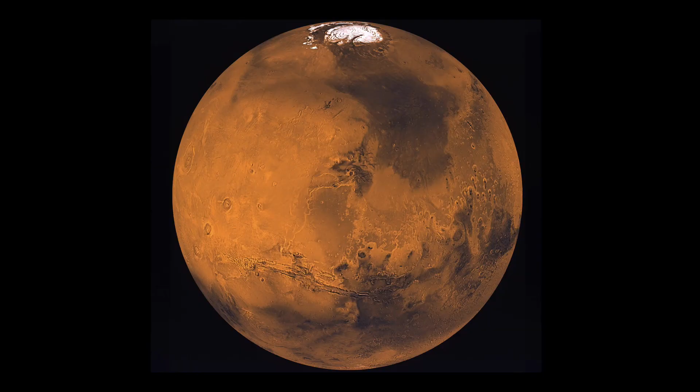NASA's Viking project accomplished the first successful robotic landing and detailed scientific study on the surface of Mars, twice. Vikings 1 and 2 were launched from Earth in 1975 and reached Mars in 1976. Each of the two Viking missions had an orbiter spacecraft and a lander spacecraft.

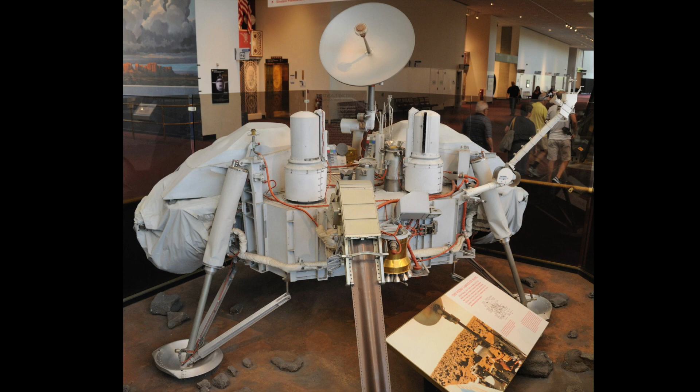The orbiters acted as mothership for their respective lander, encapsulated for protection during launch, cruise, and an initial Mars in-orbit period of about a month. The landers were designed and built by Martin Marietta Aerospace, now part of Lockheed Martin. Both Viking landers 1 and 2 landed safely in July and September 1976 respectively.

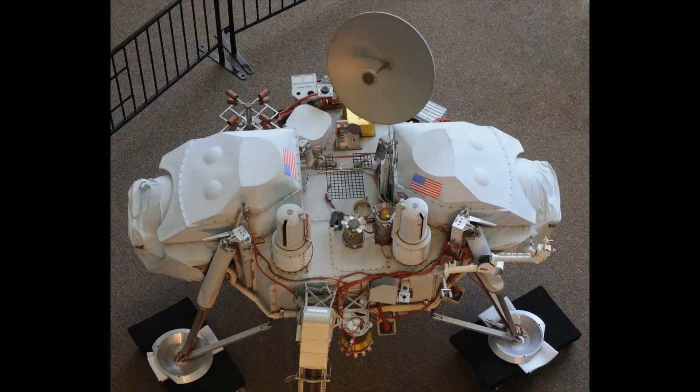In order for humanity to learn the results of the lander's imaging and other science investigations and engineering aspects of the lander spacecraft, some means of interplanetary communication was necessary. The landers also needed the ability to receive information from mission controllers on Earth in order to adapt pre-programmed plans to actual circumstances encountered on Mars. Therefore, each Viking lander had specialized radio systems.

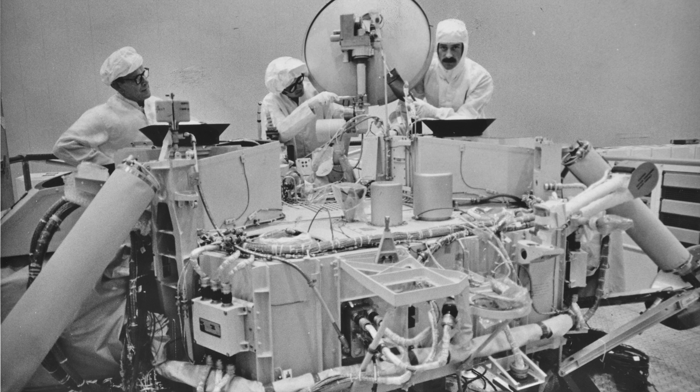All of the lander's radio components were designed and built by RCA as subcontractor to Martin Marietta Aerospace, who built the overall lander. Martin Marietta also provided the interface hardware for mating the radio equipment to the lander, parts of which were rather complicated, as will be shown. The lander had two independent radio subsystems.

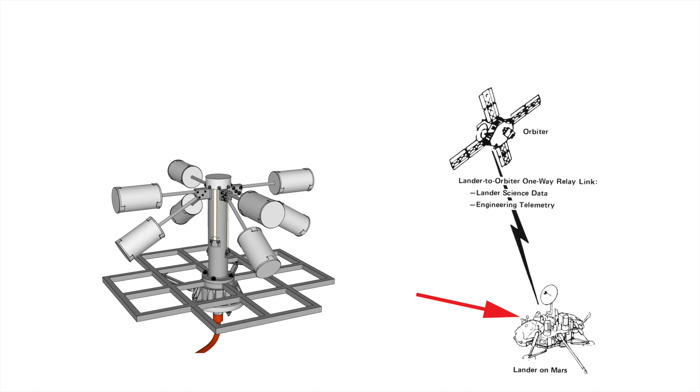The relay communications equipment, which used a broad pattern antenna to transmit information from the lander to either of the two Viking orbiter spacecraft orbiting approximately once per day around Mars. The chosen orbiter would then relay the information to Earth using the orbiter's relatively powerful radio system. The lander's relay radio transmitted at 381 MHz in the ultra-high frequency or UHF region of the spectrum.

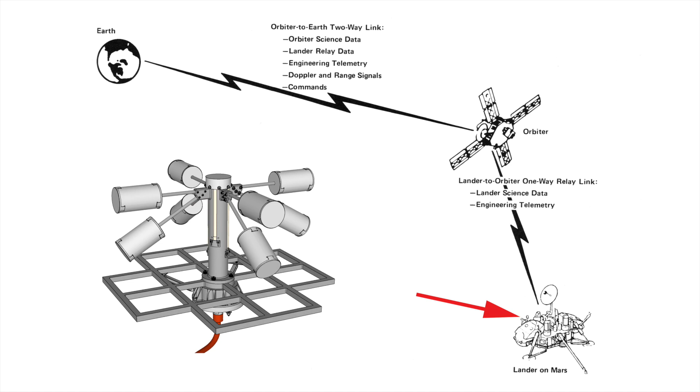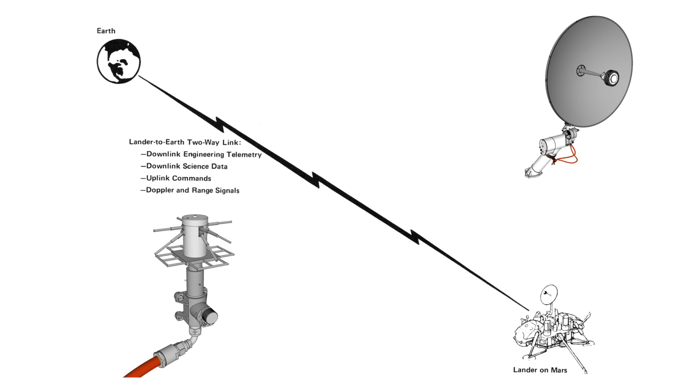The lander's second radio subsystem was the direct communications system, which could both transmit and receive information directly to and from Earth. There were two S-band antennas, a broad pattern low-gain antenna which could only receive from Earth, and a steerable high-gain antenna which could transmit and receive directly to and from Earth. This subsystem operated in the S-band region of the spectrum, receiving on 2113 MHz and transmitting on 2290 MHz.

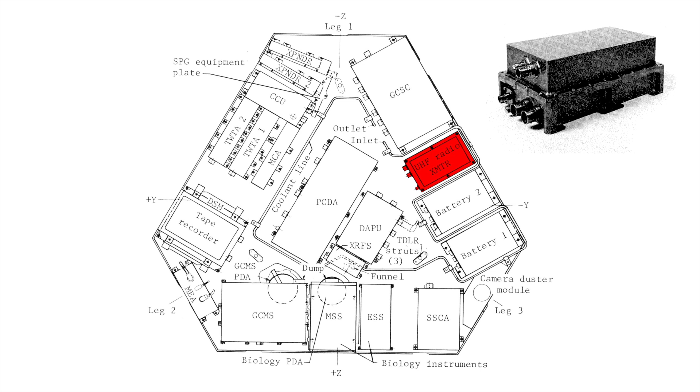All of the radio electronics components were built by RCA's Astro Electronics division and were located within the lander. For the UHF relay communications equipment, this included a transmitter. The S-band direct communication system had a number of components. Two transponders, which performed S-band radio frequency or RF reception and generation of the RF transmission signal using a modulator exciter unit.

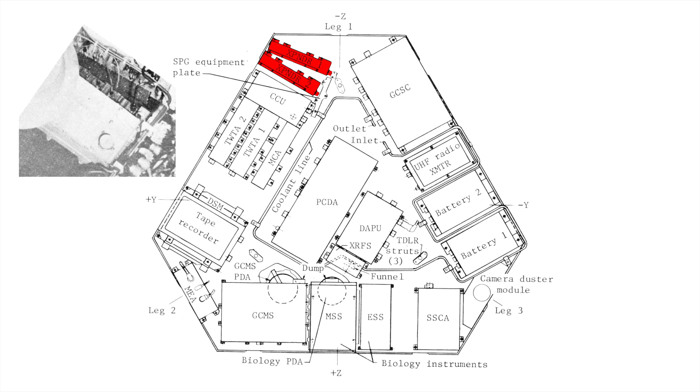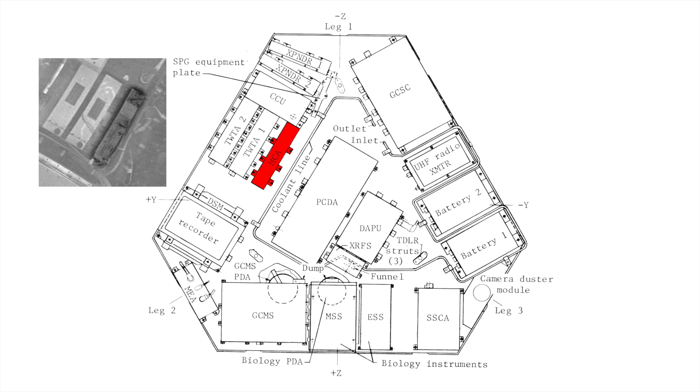Two traveling wave tube amplifiers, which provided power amplification of the transponder output as needed for transmission by the high-gain antenna. A microwave components assembly, which handled RF filtering and splitting of radio signals and switched the output of either traveling wave tube amplifier to the high-gain antenna.

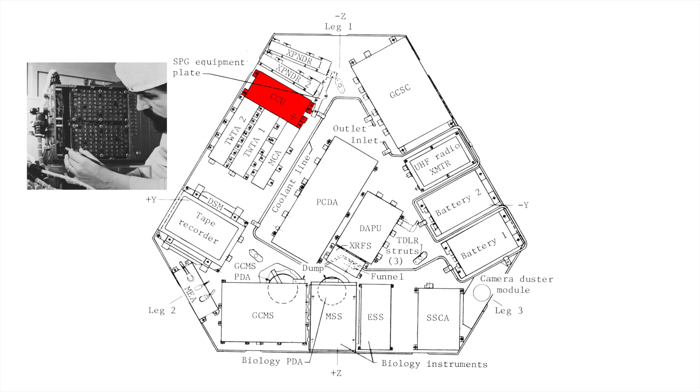A command and control unit, which handled command detection and decoding and interfacing with other components, including the lander's computer, and controlled the high-gain antenna steerable drive mechanism. The three antennas were built by RCA's Missile and Surface Radar division. This video uses a work-in-progress, high-fidelity digital 3D model of the lander to show mechanical aspects of the antennas.

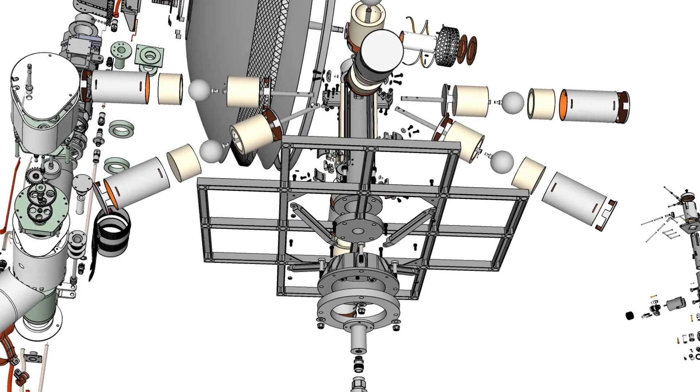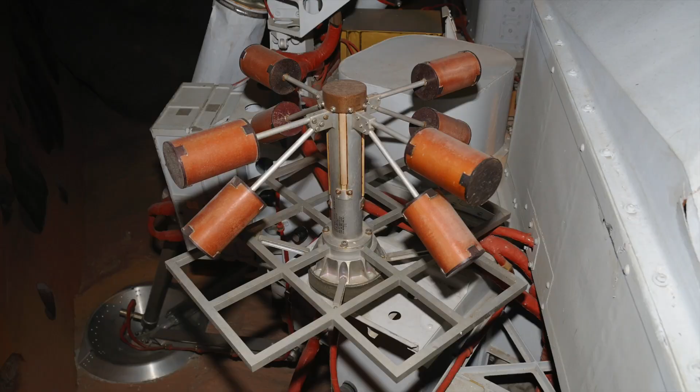The antenna used for a given communications pass depended on various factors, including phase of the mission, orbiter and Earth ground station scheduling, electric power available on the lander, and quantity of data to be broadcast. The first lander antenna to be used on landing day was the UHF relay antenna. It was activated just before the lander capsule separated from its orbiter.

Engineering and science data from the lander and from instruments mounted within the aeroshell to study the Martian upper atmosphere during descent were continuously transmitted to the orbiter, which transmitted it to Earth in real time. The data were also stored on the orbiter's tape recorder, which proved critical for Viking 2 when its orbiter lost communications lock on Earth during descent and landing. After orbiter recovery a few hours later, the stored Lander 2 data were successfully sent to Earth.

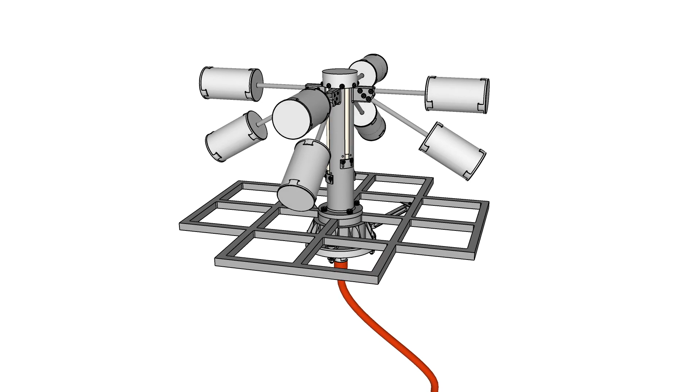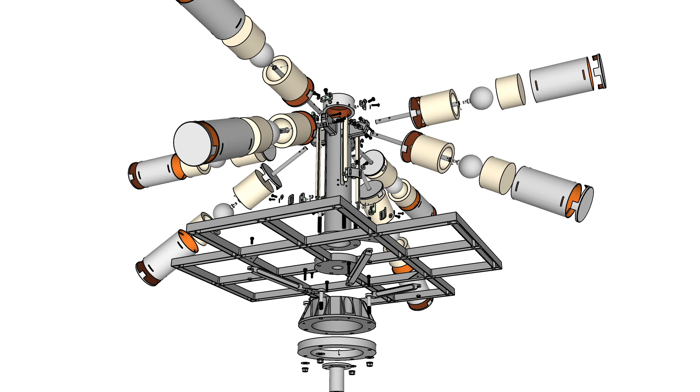The UHF antenna design featured two superimposed turnstiles over a tuned 3-wire grid ground plane. The arms of each turnstile emitted the radio frequency signal. The lengths and angles of the arms produced an approximately hemispherical radiating pattern. A broad pattern was necessary for the transmitted signal to reach the Viking orbiter without requiring accurate lander orientation, such as during Mars' atmospheric entry and shortly after landing as the orbiter passed high overhead. The open grid ground plane reflected the RF signal to increase its upward strength.

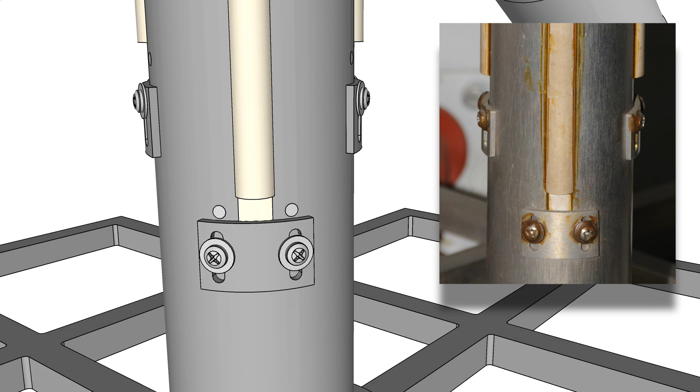Grid spacing was chosen based on the UHF wavelength of the emitted RF signal. The antenna central housing had 4 slots cut into it, which helped the antenna generate the exact desired RF frequency. Small tabs at the bottom of each slot allowed fine adjustment of the antenna characteristics. The slots were filled with insulating dielectric rods to increase the usable transmitter power, selectable between 1, 10, and 30 watts, without causing electric arcing across the gap. The rods also prevented entry of Mars dust.

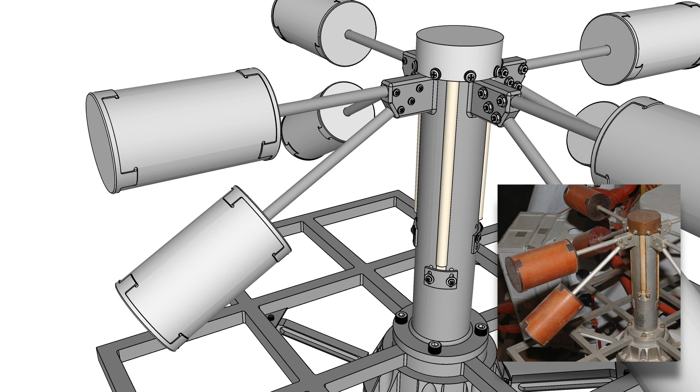Each arm terminated in a large metal ball. These prevented damaging corona discharge arcs from occurring at the arm tips, which are prone to occur in low-pressure carbon dioxide environments such as the Martian upper atmosphere. The corona balls were enclosed in polyurethane foam with fiberglass covers. The photograph shows an unpainted test antenna.

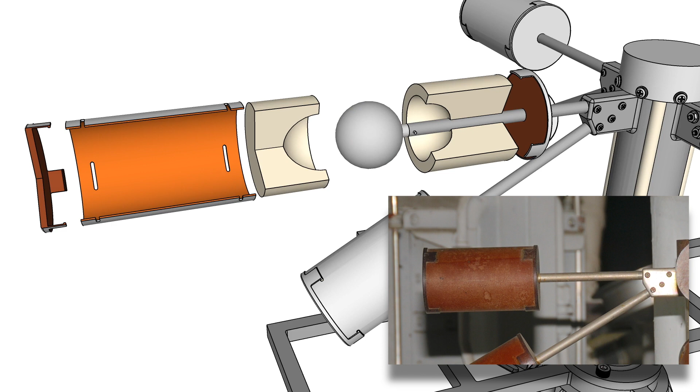Perhaps the most notable use of the UHF antenna was to transmit the first image ever taken on the surface of Mars, July 20, 1976. The image was captured and sent by Viking Lander 1 during the first few minutes after landing. Orbiter 1 relayed the image data to Earth in real time as it was being received from the lander.

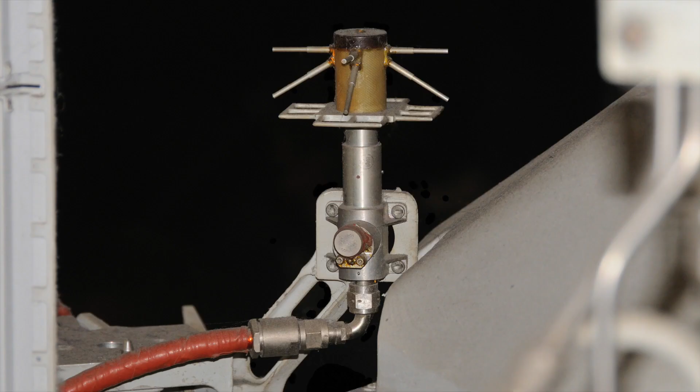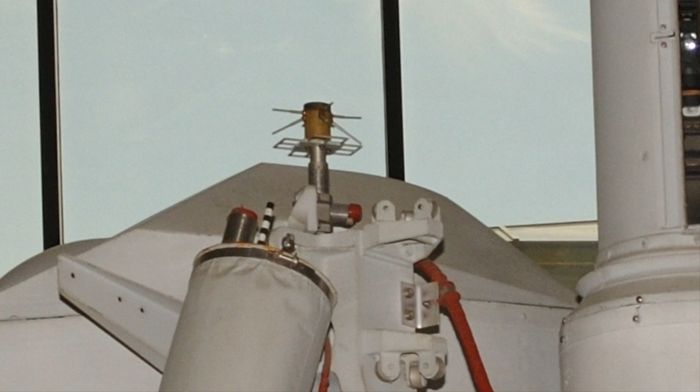The S-band low-gain antenna, or LGA, was designed to receive new spacecraft commands from Earth and store them into the lander's computer memory. In order to be as flexible as possible, the LGA reception pattern was essentially the hemisphere above the lander, so that if Earth was visible in the Mars sky, then the lander could receive a signal regardless of the lander's tilt or compass orientation.

The LGA had the same basic double turnstile over 3-wire ground plane reflector design as the UHF antenna, scaled smaller to account for the S-band's higher radio frequency and thus shorter wavelength compared to the UHF band. The LGA did not need any protection from corona arcing at the turnstile arm tips because the LGA did not transmit and thus did not have high power applied to the arms.

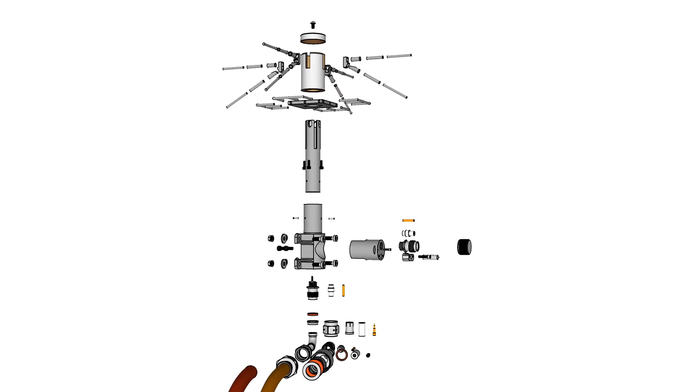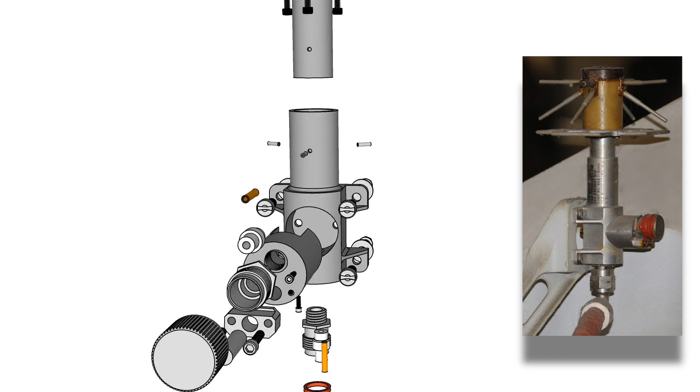Within a cylindrical fiberglass phenolic radome, the LGA's housing retains the 4-slot configuration of the UHF antenna. The photograph is of an unpainted test unit. The capped coaxial cable connector on the side of the LGA base was used during pre-launch antenna testing.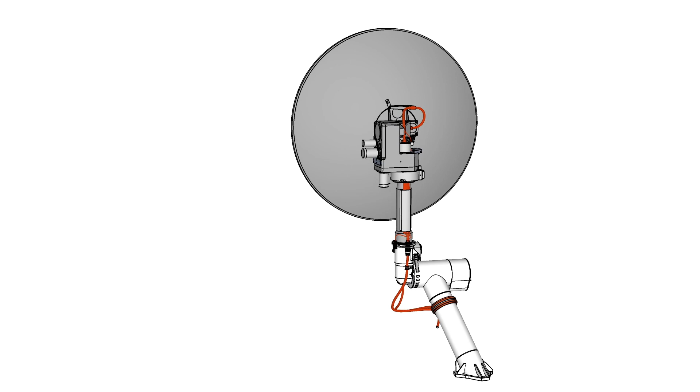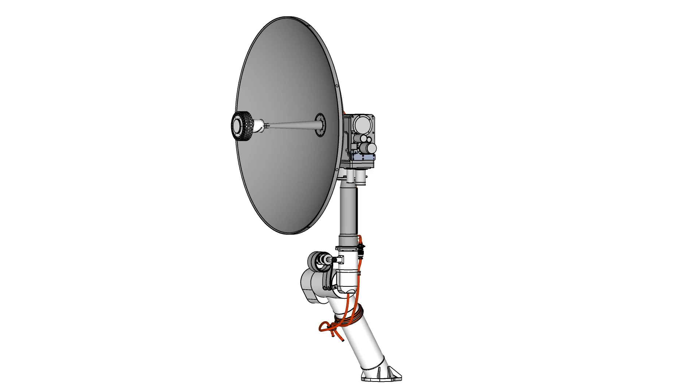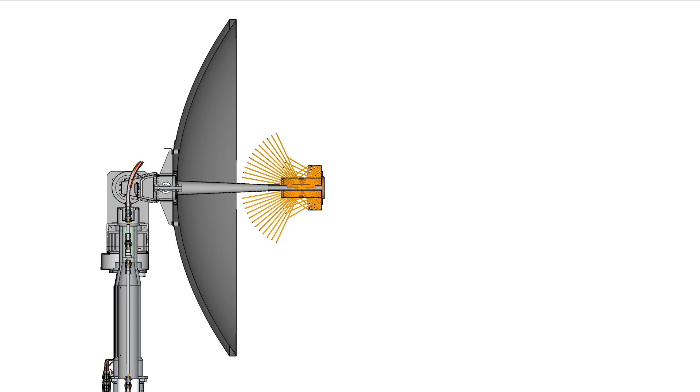The most complex of the Viking lander's 3 communications antennas was the S-band high-gain antenna, or HGA. In order to transmit a signal across hundreds of millions of miles that could be picked up on Earth, even by the huge and extremely sensitive receivers of NASA's Deep Space Network, the HGA needed to concentrate its 20-watt maximum RF power within a fairly narrow cone pattern pointed at Earth. This was accomplished by the HGA's 30-inch diameter parabolic dish reflector. The term high gain refers to effective amplification of the emitted radio signal by focusing its energy in the direction to which the dish points.

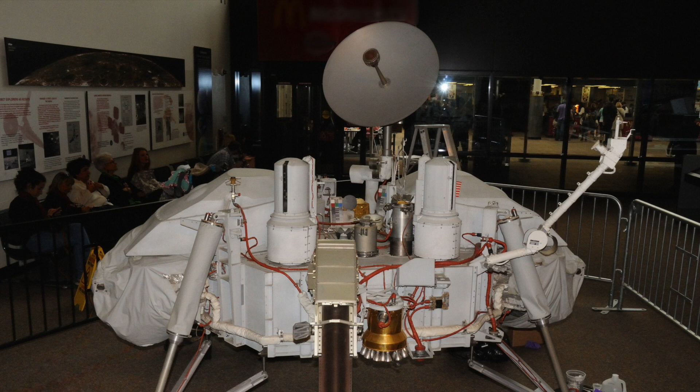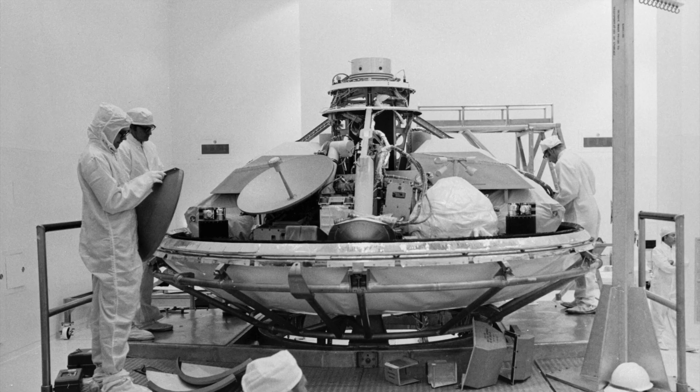The dish needed to be located as high as possible for best line of sight from the lander to Earth when above the local Mars horizon, in order to minimize obstructions from other lander components. Meeting this clearance requirement was challenging due to the limited volume available within the protective shell in which the lander was encapsulated until shortly before landing on Mars. As a result, the RCA-built antenna was mounted on a hinged deployment mechanism built by Martin Marietta. The HGA mast was stowed or folded down during launch from Earth, cruise to Mars, and landing on the surface.

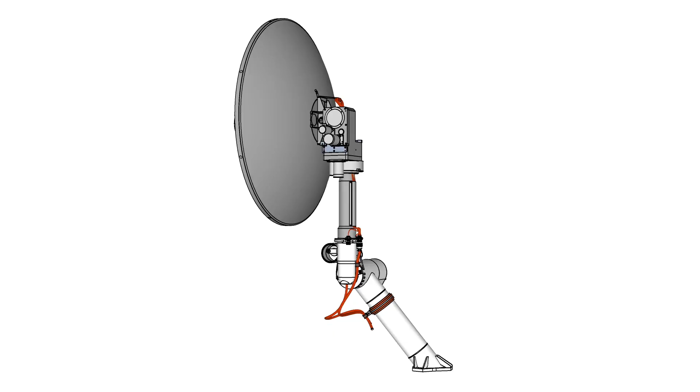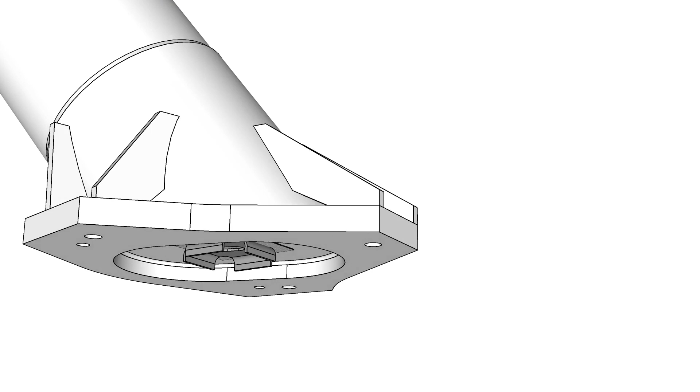Antenna mast rotation was precisely limited both when stowed and deployed by pins installed in the mechanism's elbow and stop shoulders integrally machined into the hub. The deployment mechanism's support tube and hub were vented via a filtered opening on the bottom of the base plate. This allowed the mechanism to cope with a range of atmospheric conditions, from Earth sea level pressure to the vacuum of space during cruise to Mars, to the low-pressure surface atmosphere on Mars. The filter prevented any Martian dust from entering the deployment mechanism and possibly jamming its bearings.

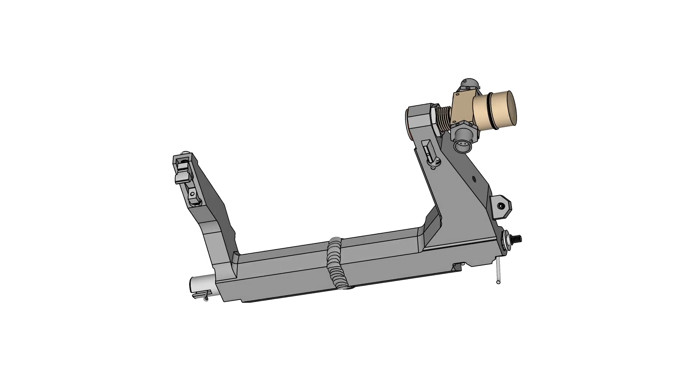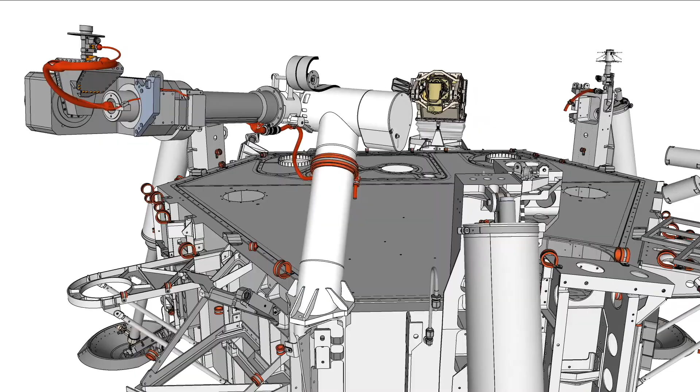A downlock mechanism held the stowed antenna in place securely, both to prevent inadvertent deployment and to stabilize the antenna during the strong vibrations of Earth launch, Mars atmosphere hypersonic entry, and landing. When manually stowed before launch, the HGA's drive head fitted between the two arms of the downlock. A tab on each arm engaged slots in the blue stabilizer fittings attached to the drive head.

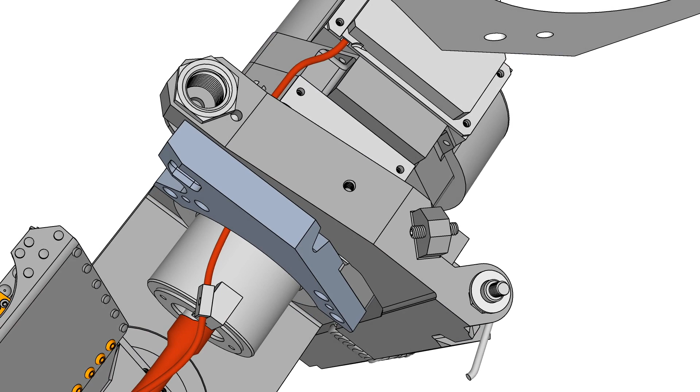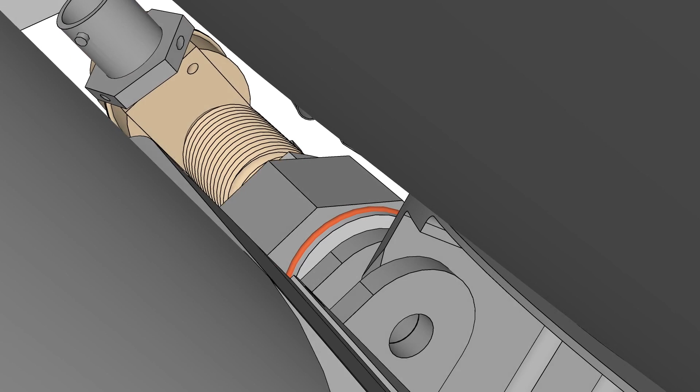The antenna was locked in place by a pyrotechnic pin puller device mounted on the downlock. Before launch, the HGA dish was rotated to align a tab on the back of the dish mounting frame within a clevis built into the drive head. A sturdy pin or rod extended from the pin puller and passed through clevis and tab. The pin thus locked down the HGA's folded mast and also kept the dish fixed in its minimum volume configuration.

Within the pin puller, a small shear pin prevented the main pin from retracting inadvertently. A few seconds after landing on Mars, the HGA was released by firing the downlock pin puller. The pin puller was actuated by two redundant Viking standard initiators, or VSIs. An electric current ignited a very small zirconium potassium perchlorate explosive charge within each VSI.

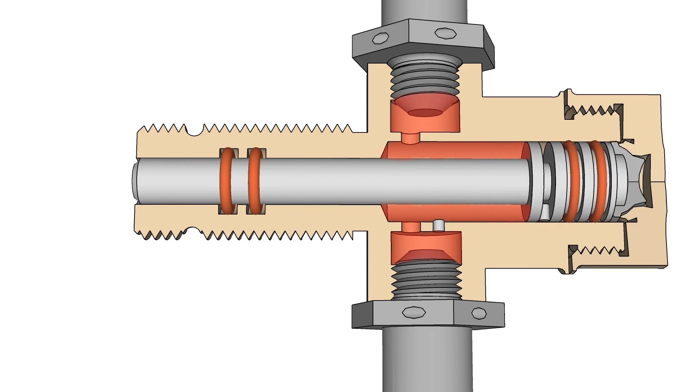The resulting rapid combustion generated a high-pressure pulse of gas which was expelled from the VSIs into a small chamber within the pin puller. The expanding gas pushed on the underside of the pin's flanged head with sufficient pressure to break the small shear pin. The main pin then rapidly retracted into the pin puller body. A deformable shock absorber cap slammed into the end of the pin puller and deliberately jammed the fully retracted pin,

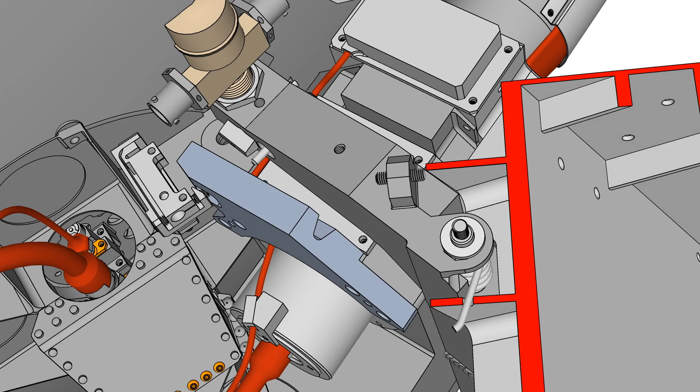preventing rebound. With the pin withdrawn from the clevis, a torsion spring on the downlock pivot axle rotated the downlock arms slightly away from the HGA drive head, disengaging the stabilizer tabs. That entire release process occurred in only a fraction of a second. The high-gain antenna mast was then free to deploy. The mast was raised by a pair of constant force springs.

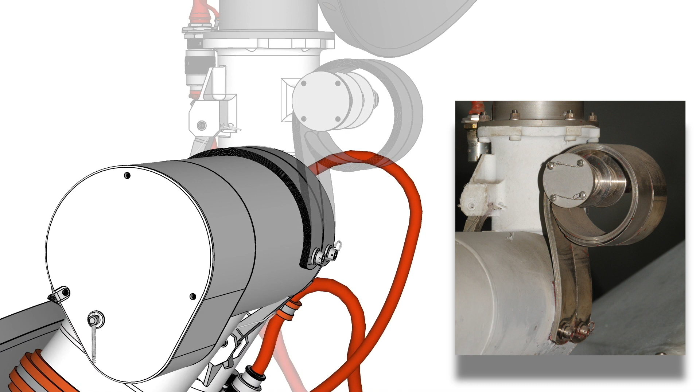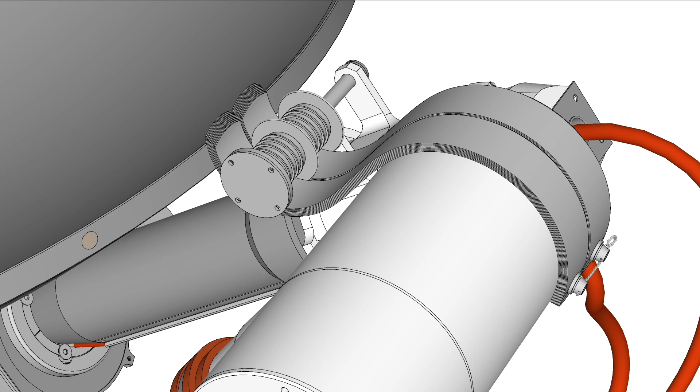The two roll-up power spring assemblies, each with 9 cobalt chromium nickel alloy laminations, provided 400 inch-pounds of torque. With one end of the springs anchored to the deployment mechanism's hub, the powerful curl-up or roll-up force exerted a pull on spools attached to the rotating elbow. The freewheeling spools reduced friction at the point of spring contact. As the springs returned to their natural, tightly curled state, the elbow was pulled upright, which raised the attached antenna.

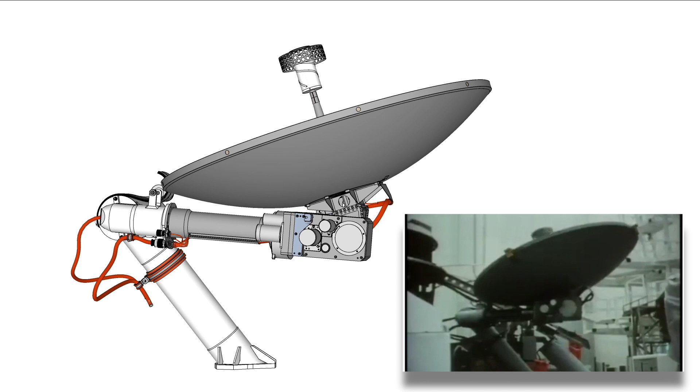The power spring's curl action was strong enough, if unimpeded, to raise the 6-pound in Mars gravity antenna fairly quickly, especially if the wind was helping to push the antenna dish. A potentially damaging shock could occur when reaching the upper stop limit. To prevent this, an anchor-recoil escapement governor limited the rate of mast elevation.

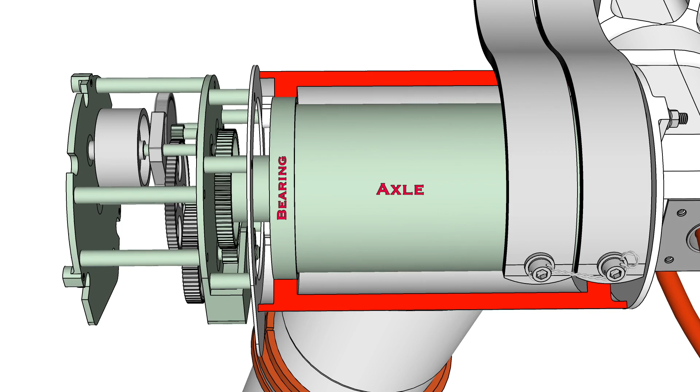The deployment mechanism's rotating elbow was connected to a sturdy axle within the hub. The axle and simplified bearings are tinted green to denote that the geometry is approximate. I lack references for the actual shapes. The axle drives a 300-to-1 gear train. The 3D model's green gearbox shape is speculative, but the gear train itself is accurate. The final stage of the gear train drives a 24-tooth escapement wheel through a simple ratchet clutch, which is engaged during deployment.

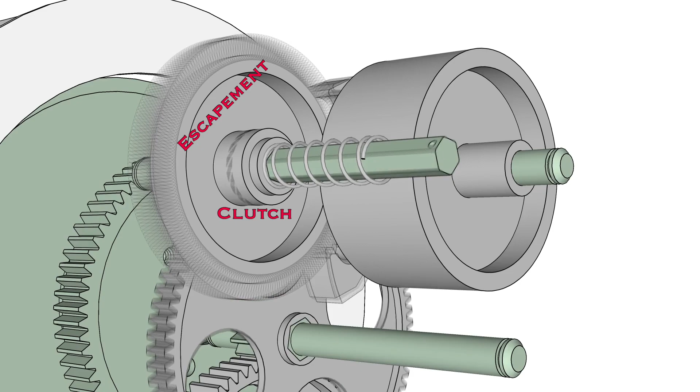A rocking pallet prevents unrestricted or runaway rotation of the escapement wheel. A cylindrical torsion or rotating pendulum is connected to the pallet, which adds rotational inertia to slow down the pallet's rocking action. Even with the torsion pendulum, the escapement operates very rapidly. The motion is slowed down by 20 times here to more easily see the rocking action of the pallet and the interrupted rotation of the escapement wheel.

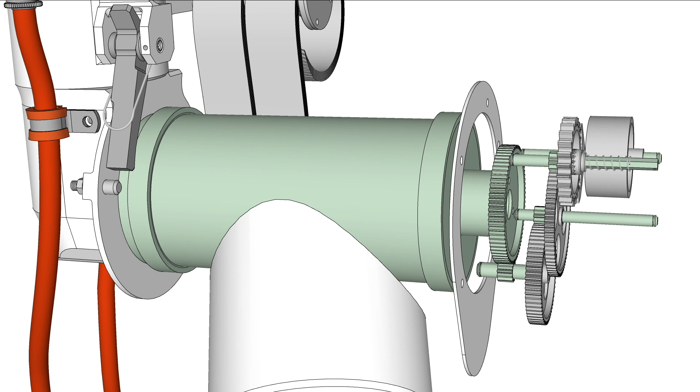The ratchet clutch mentioned previously allowed the governor mechanism to be bypassed while the antenna was stowed a number of times during testing and one final time before flight. This was important because the escapement was only designed to be driven in the forward direction. When the antenna and deployment mechanism were manually rotated down, as seen here, the elbow and axle drove the gear train in reverse.

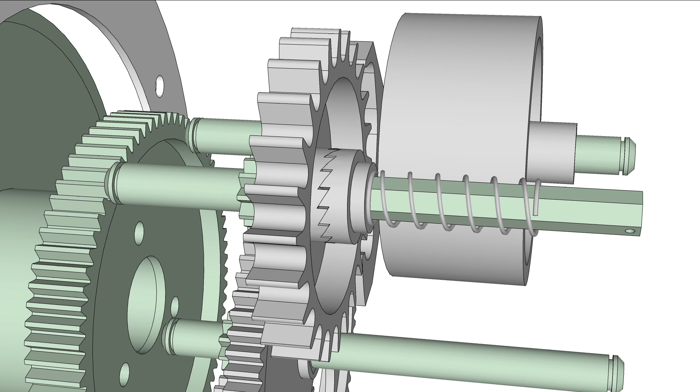That caused the teeth of the spring-loaded outboard half of the ratchet, which was directly driven by the final stage of the gear train, to skip over the inboard ratchet teeth that were machined as part of the escapement wheel. The escapement and pallet, therefore, could remain stationary during antenna stowage.

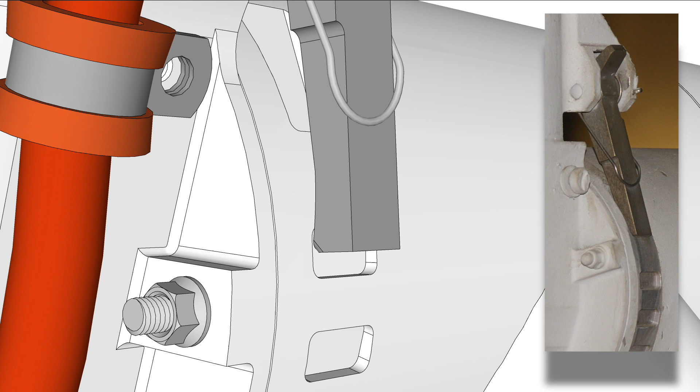To prevent the antenna from pivoting back down due to a mechanical failure or stronger than predicted wind gust, a ratchet uplock mechanism was used. After a few minutes of rate-limited rotation, the high-gain antenna was fully raised, locked, and ready for use.

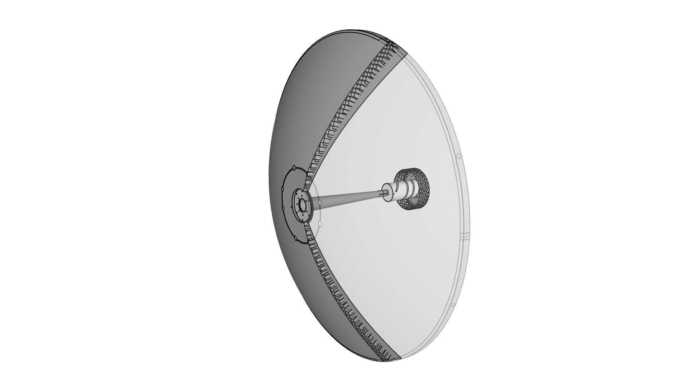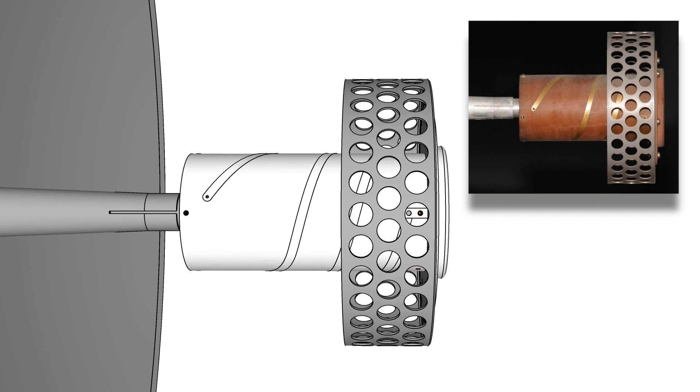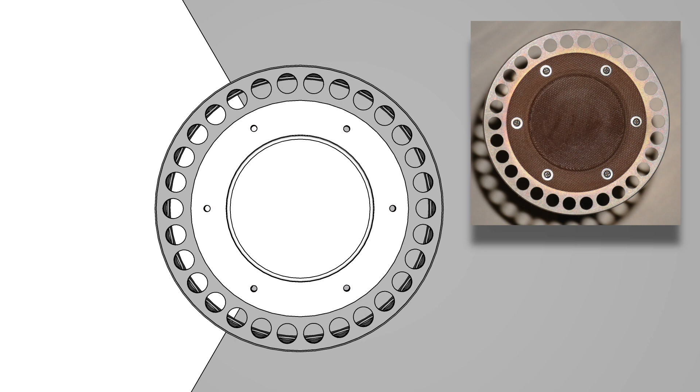At the front of the feed was a perforated cylindrical ground plane. This increased the antenna's effective power by reflecting radio waves to or from the feed. The perforations reduced weight and buildup of Mars dust without impacting RF behavior.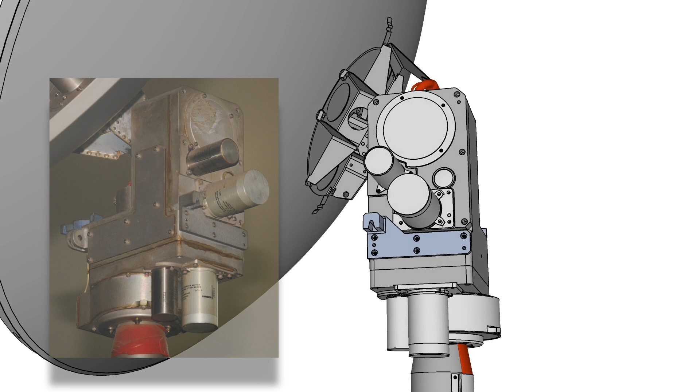The HGA sensitivity was highly directional and therefore needed to accurately point toward Earth. Continuous Earth tracking during antenna use was performed by a steerable drive head. The motion seen here is accelerated for clarity. Electric stepper motors rotated the antenna dish in azimuth, or side to side, and elevation, or up and down. Position resolvers on each axis provided feedback to the control circuitry to detect and correct actual versus commanded pointing direction.

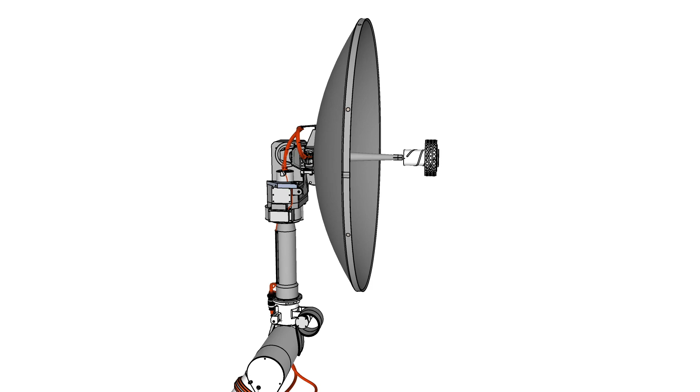The RF signal was passed through a coupler within the dish mounting frame and then via a coaxial cable into the drive head. A non-contacting rotary choke enabled the drive head to rotate without twisting the coax cable. Another segment of coax cable then carried the signal out the bottom of the stationary antenna mast.

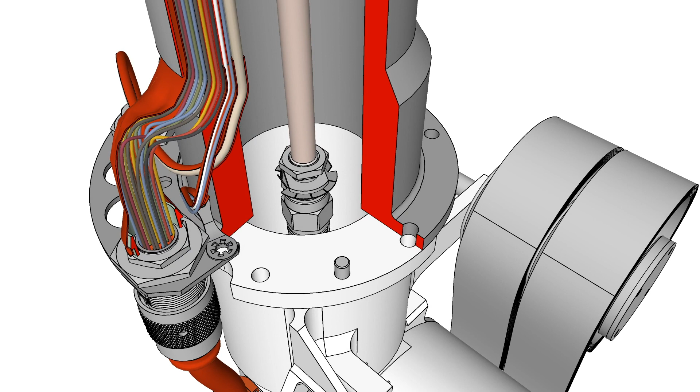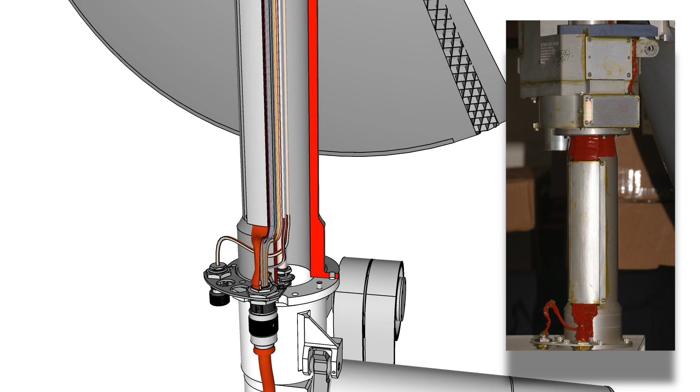An array of electrical control, power, and ground wires, along with a small coax cable which allowed sampling of the RF signal during pre-launch testing, were routed under a shield on the outside of the mast. Within the drive head, the wires had sufficient slack to be able to wrap twice around the drive head azimuth axis.

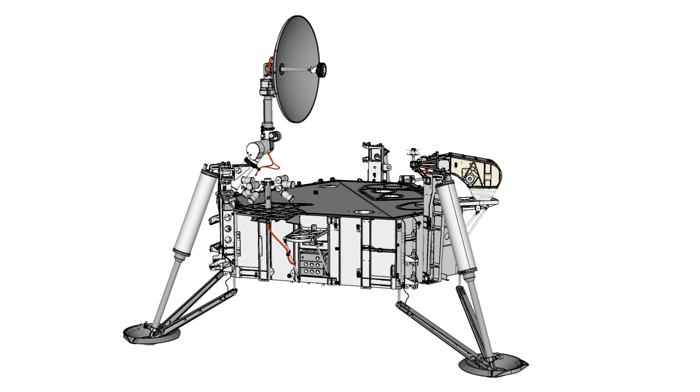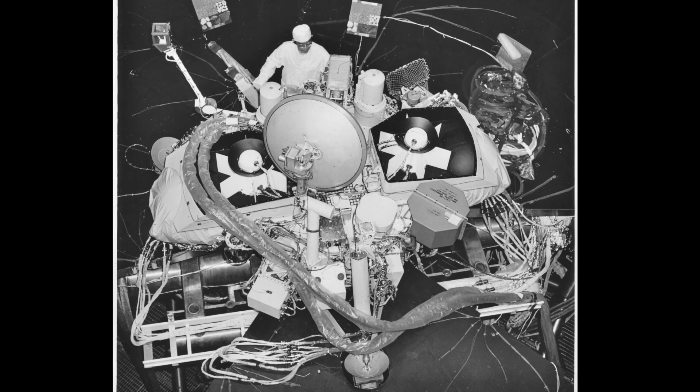The high-gain antenna on Viking Lander 1 enabled it to continue operating on its own after the two Viking orbiters reached their end of life and were shut down, 1978 for Orbiter 2 and 1980 for Orbiter 1. Viking Lander 2 reached its end of life in April 1980 after 3.5 years operating on Mars. Lander 2's rechargeable batteries, which were powered by plutonium-fueled radioisotope thermoelectric generators, had failed.

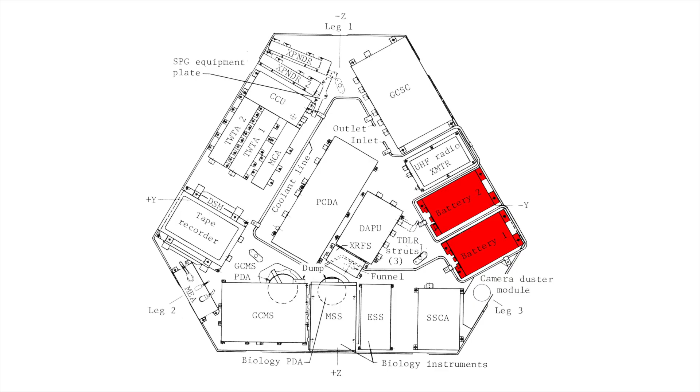Operation of Lander 1, the last surviving Viking spacecraft, ended in November 1982 after 6 years operating on Mars due to a mistake involving its high-gain antenna and batteries. The nickel-cadmium batteries on both landers had experienced gradual loss of charge-holding ability, as do rechargeable batteries to this day. Occasionally, new software was uploaded to each lander's computer with a revised charge-discharge program. These procedures extended the battery's useful life as operational experience was gained.

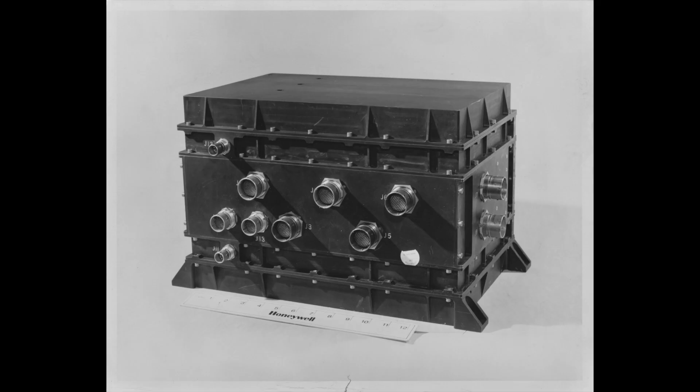On November 19, 1982, a new battery program was uplinked to Viking 1. Unfortunately, the reprogramming instructions inadvertently commanded the lander computer to store this program into the wrong portion of memory. Rather than replacing the previous battery control program, it overwrote the high-gain antenna pointing program. Unbeknownst to the Viking team members, the antenna had just been commanded to point in an unknown direction by an inappropriate algorithm.

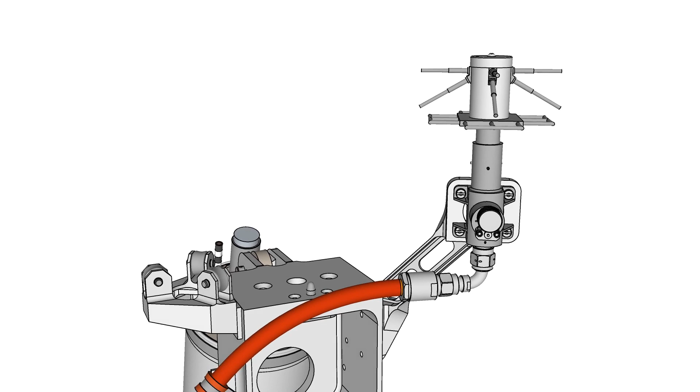After the uplink was complete, normal attempts were made to acquire the typical downlink response from the lander. These attempts failed, and a spacecraft emergency was declared the next day. Ordinarily, the omnidirectional low-gain antenna could have been used to receive a re-uplink of the antenna pointing program. However, the LGA could only use the lander's transponder 1, and its receiver had failed earlier in the mission. The HGA was using the remaining transponder 2, but the HGA was now pointing where?

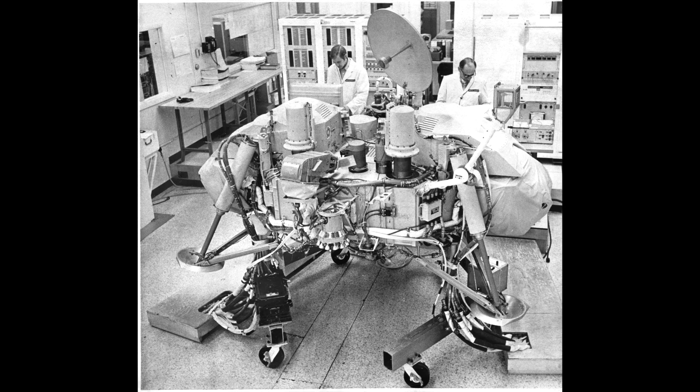Extensive diagnostic efforts were carried out with identical hardware on Earth. Repeated attempts were made to transmit new instructions to and listen for signals from the lander when, during the next few months, the ever-changing solar system geometry yielded potential alignment between Earth and where the antenna on Mars was hypothesized to be pointing. Despite all this, communication was never restored. The incredibly informative Viking mission, humanity's first study on the surface of Mars, was declared ended in May 1983.

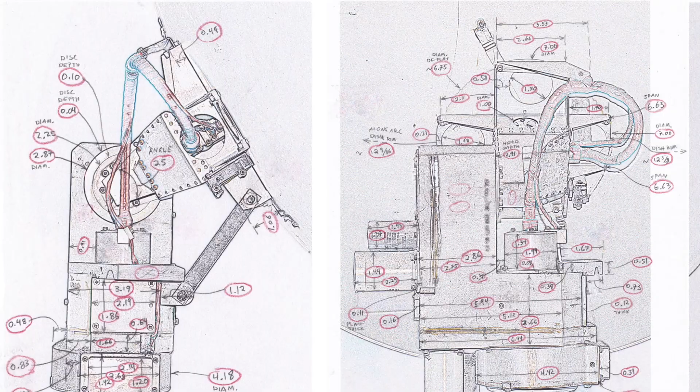I am grateful to a number of organizations for allowing me to conduct research on the Viking artifacts they have preserved. Special thanks to the Viking Mars Mission's Education and Preservation Project, who granted me many hours of access for measuring and photographing a high-gain antenna in their collection. This included use of an endoscopic camera for recording close-up imagery within the confined volumes of the hardware.

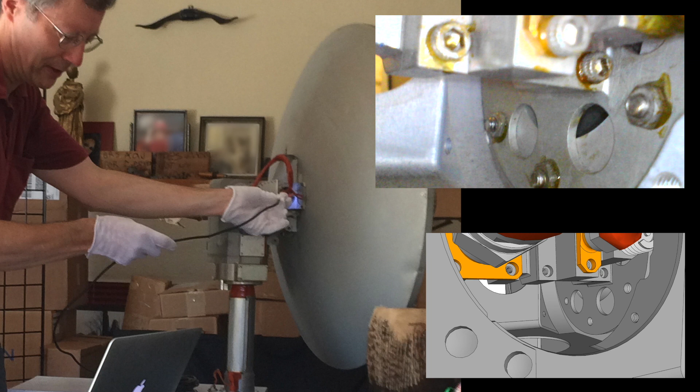Thanks also to the Museum of Flight in Seattle, Washington, the California Science Center in Los Angeles, California, the Virginia Air and Space Center in Hampton, Virginia, NASA's Langley Research Center, also in Hampton, Virginia, the Smithsonian National Air and Space Museum in Washington, D.C. Thank you to all.